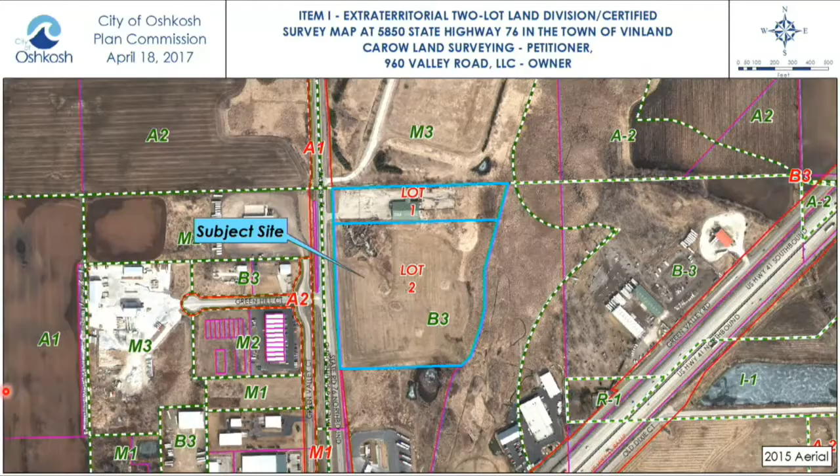And here's the proposed CSM. Staff recommends approval of the two-lot extraterritorial land division as proposed.

All right, any technical questions from the commission? Jeff? There's a well on Lot 2. Is that well being used by the residents on Lot 1? Is that going to create a problem? That's the old Gulf Central. Is that well used by that? I don't believe that was noted in the application.

I guess I'd wonder if it's being used, if that's going to cause a problem between Lot 1 and Lot 2, if Lot 1's using that well, because it's so close to the lot line. And then I assume that there's no issue with the wetlands delineation. No. I'd ask staff to just clarify the well issue.

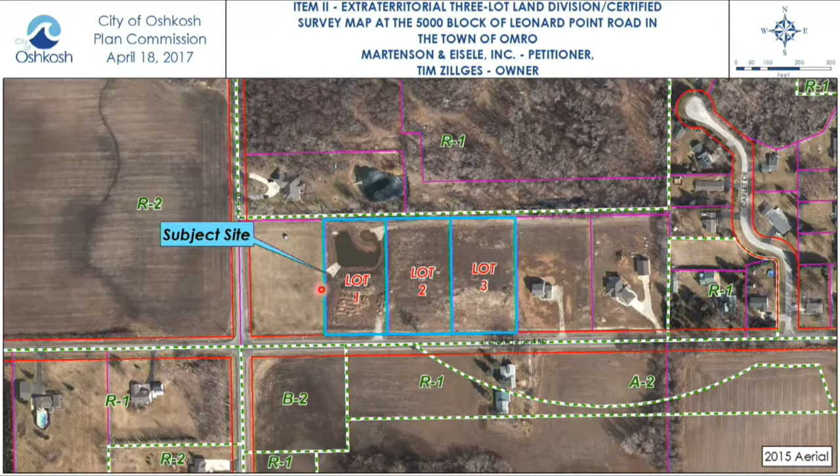Together, they form a mini-type subdivision, and on the CSM there are a bunch of easements depicted for stormwater mitigation, including the previously mentioned stormwater basin on Lot 1. The proposed land division will not alter the existing land use patterns in the area.

It is consistent with the city's 10 and 20-year residential comprehensive land use plan. Staff has no concerns with the proposed lot layout or sizes, as they're similar to other parcels in the immediate vicinity, although being over an acre in size, it's larger than what's present in traditional style subdivisions.

One advantage is that Leonard Point Road, while still classified as a local road, receives a lot of traffic, so the larger lots will reduce the number of potential driveway curb cut openings. The Department of Public Works reviewed the proposed division and did not have any concerns. Staff is recommending approval of the 3-lot extraterritorial land division as proposed.

Technical questions, starting with David: is there any provision, or is it necessary to have any provisions, for the operation and maintenance of the stormwater detention pond? More than likely it would be handled by Winnebago County, if they require that, or the town of Omro. So nothing that has to be recorded.

Other technical questions? Anybody else? Seeing none, anyone here from the public to speak to this site? Seeing none, back to the commission.

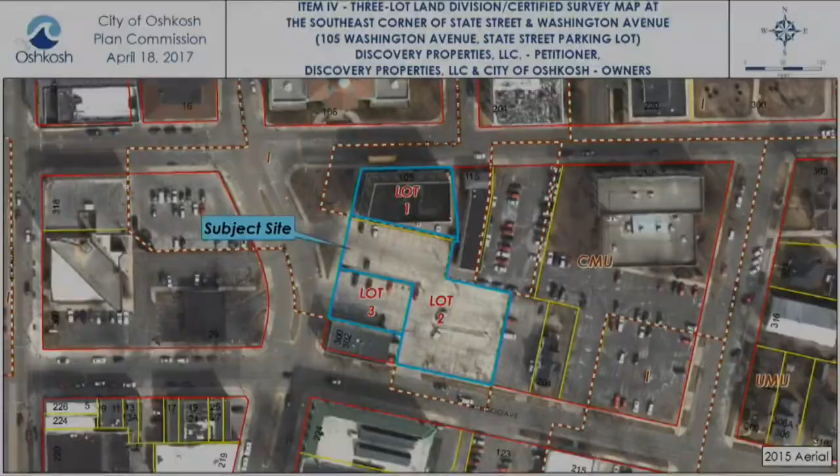This is a map of the proposed CSM, and a map of the proposed layout for the parking garages — one along here, and a larger double-sided garage towards the southeast corner.

With that, staff is recommending approval of the 3-lot land division as proposed with 2 conditions: first, proposed Lots 1 and 2 shall be deed restricted or tied together by some similar instrument; second, all required easements shall be placed on a final CSM per approval by the Department of Public Works.

A commissioner asked whether the amount of parking stalls resulting from this would satisfy the code requirements for the apartments. Staff clarified there are 20 apartments, requiring 40 stalls at 1 per bedroom, and confirmed there are 41 stalls proposed on that lot, so the requirement is met.

Are there any other technical questions?

Is anyone here from the public to speak to this item today?

Not good at following the rules. Sorry, that's okay. Mike Goodrow, 4482 Harbor Village Drive.

I'm one of the owners of Discovery Properties. We're very excited to move forward with this portion of the project. The building is completed, we have people living there now, and the lease up has gone very well. It has confirmed to us that we want to build these garages. It opens up a whole new market that we've not seen downtown, so we want to move ahead with the project.

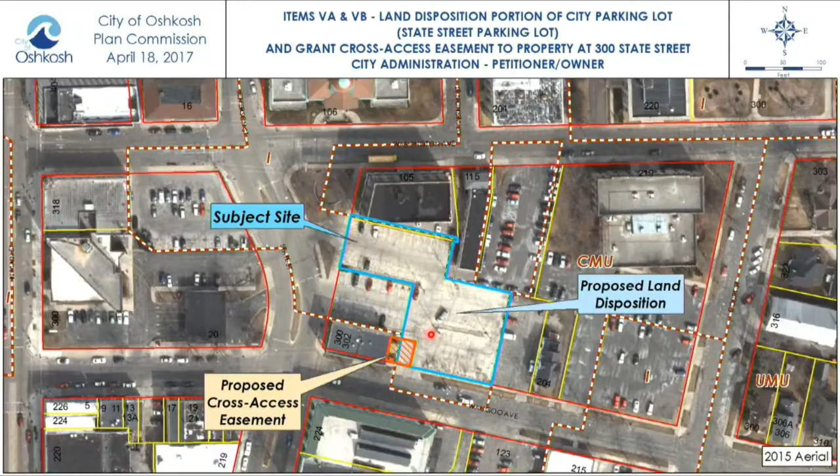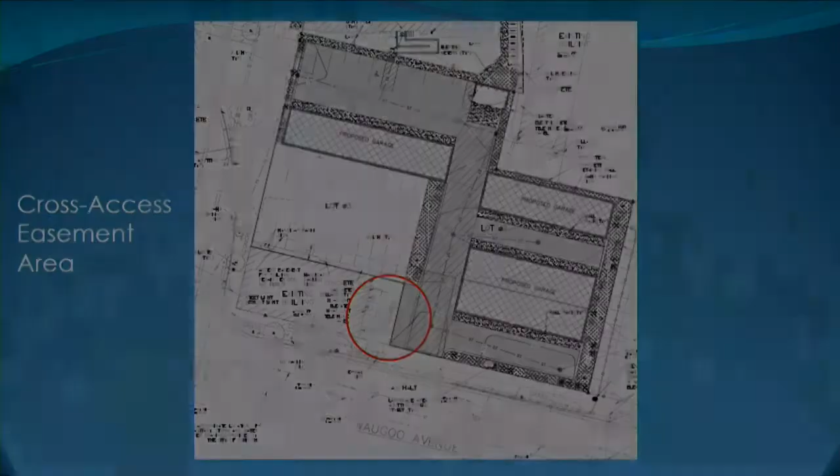The land disposition is approximately 25,351 square feet in size. The cross-access easement, shown in closer view here, will allow vehicles or parking currently located at 300 State Street to access off the proposed curb cut on Waugoo and utilize that parking. Staff has been working with the developer of the Washington Flats and the property owner at 300 State Street, and staff is recommending approval of both the land disposition and the granting of the easement as proposed.

Technical questions from the commission. Ed asks: should we have done all three of these together, since this could be a separate lot—does that go to council or not? It does not, because that's a separate lot. Correct, so we've already separated this. Yes, that's final.

How many of these stalls being disposed of are permit stalls versus public stalls? Clearly the parking study says they're underused. Correct—they're not essentially being utilized. The parking study found an average of 10 cars parking in the existing State Street lot, and we would be retaining a total of 20 public parking stalls, consistent with current average use; the proposed future State Street parking lot will serve what is currently being utilized in that entire area.

You said in your report that the parking utility has reviewed and approved this. Yes, the city's parking utility has reviewed the disposition and the cross-access easement and is in favor. So from a technical standpoint, with our recommendation and theirs, it goes to council? Correct.